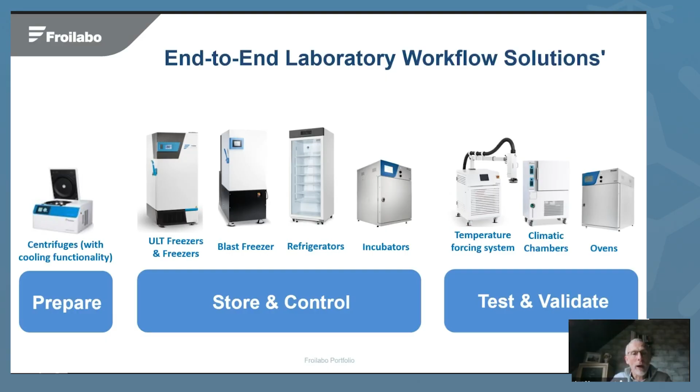requirements. Today, I will focus on sample storage at -80 degrees. We are completing our range of ULT freezers with several models based on dual cooling technology. Froilabo introduced its new BioMemory dual cooling range to offer premium performance with dual cooling technology at an affordable price. We consider that we can offer the best ratio of quality, performance, and price on the market for premium models.

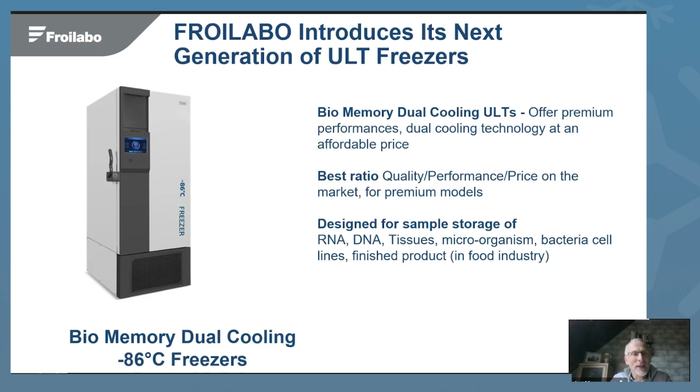As it is for our existing models, BioMemory dual cooling models are designed for sample storage of RNA, DNA, pieces of tissue, microorganisms, or finished products in the food industry. The key benefit of those models is the use of dual cooling technology. It guarantees the highest level of safety. If one compressor fails, the second one can keep the unit at -80 degrees.

But until now, the limit of dual cooling technology was cooling performance compared to the two cascade technology. With our system, we offer high temperature homogeneity and fast temperature recovery time. It is a significant difference compared to the existing models on the market. Thanks to the use of a variable speed compressor and VIP plus insulation, we have a low power consumption.

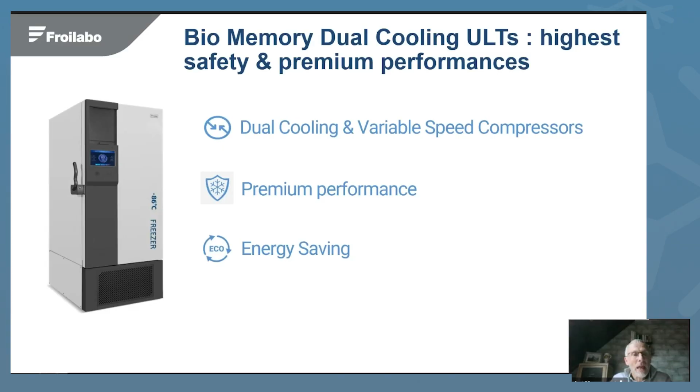We recommend using our BioMemory dual cooling if you are working in industry, a pharmaceutical company, or biotech, because you need the maximum safety level. If you want to be compliant with sample storage and ISO certification, good manufacturing process, dual cooling technology delivers the best features for you and guarantees to keep samples at -80 degrees, even if something happens in the cooling circuit.

The worst case could be a defective compressor in one ULT freezer during the weekend. With dual cooling, the second compressor will keep the temperature at -80 until the defective compressor is repaired. The low power consumption has a significant impact on the cost of operation. Today, for a 700 liter model, the power consumption is 8.5 kilowatts a day. And if we compare to the 500 liter model, we can guarantee less than 8 kilowatts a day as power consumption. It's very low.

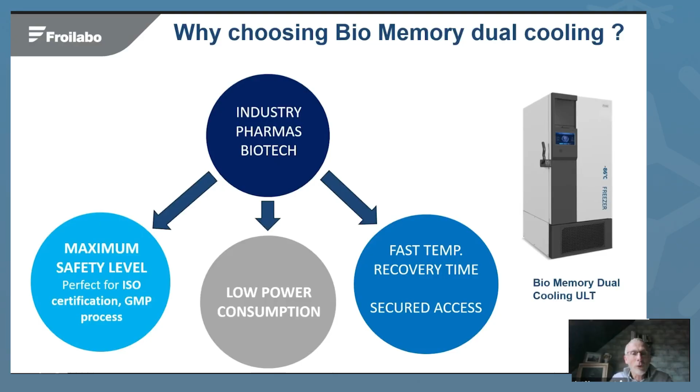And even if the end users are opening the door several times a day, we guarantee a fast temperature recovery time when you close the door. The software includes secure access with different user profiles. How does dual cooling technology work? It's very simple to understand.

As described in the drawing on the left side here, you have two independent cooling circuits, each with the ability to reach -86 degrees. We are using a mix of gases to deliver the expected cooling efficiency in each circuit. Also, now you can understand that if one cooling circuit has failed, the second one can work independently until the repair is done. We are also using the last generation of variable speed compressor to guarantee the lowest power consumption possible.

But the cabinet is also a very important part of the performance. The cabinet produced in our factory has efficient insulation, including the latest generation of VIP, and the double door design. The double door design means the main door has a gasket to close the system efficiently, and each internal door also has a gasket. Last but not least, our interface is easy to use and includes all features required by our users.

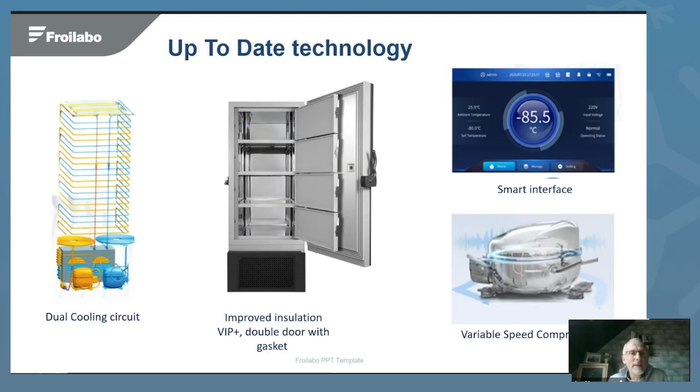We tested the performance of our equipment. Here you have the results for the BioMemory dual cooling 568 liter model. We chose this model because this is the model that the majority of customers are choosing on the market. The pull down time: we need 3 hours 30 minutes to reach -80 degrees from room temperature. It means that if you turn on the unit in the morning, before lunchtime you will reach -80 degrees. It means that your operation will be really facilitated.

I spoke before about the efficiency to recover the temperature when you open the door. If you open the main door and the top internal door for 15 seconds, only 6 minutes are needed to recover -80 degrees at the top shelves. And you can see that the center shelves and the bottom part of the cabinet are not affected by the door opening. And this is exactly the same for a 1 minute door opening.

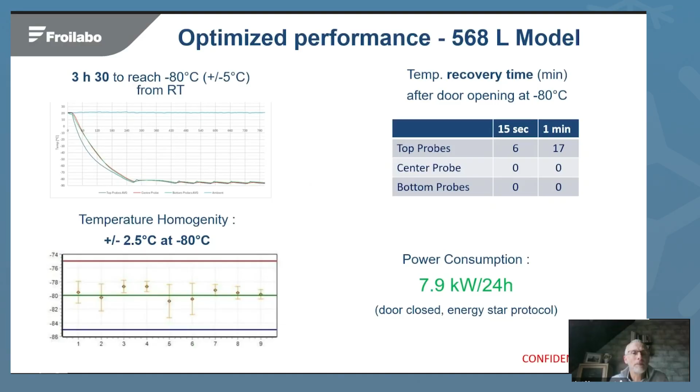Also, we guarantee the highest level of safety for your samples thanks to unique benefits. Fast recovery time, 13 minutes to recover -80 degrees, the mean value after door opening. High temperature uniformity, and the longest defrost time. The data are not shown here, but we guarantee 5 hours before reaching -50 degrees when the system is turned off. And all benefits listed here can be offered with a competitive price.

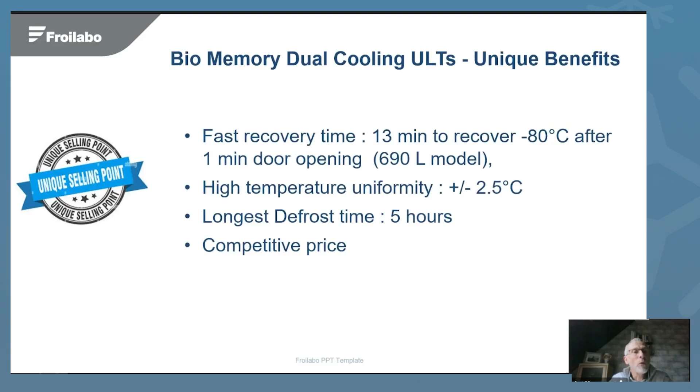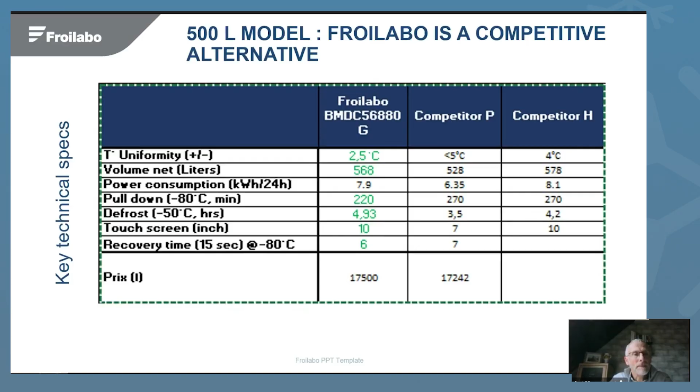How can you compare the new BioMemory dual cooling with the existing Froilabo model of ULT freezers? Our actual model, the Evolution model, is mainly recommended for hospitals, biobanks, and research centers. Why? Because we offer large volume with a small floor footprint. This is the main requirement for this type of customer. Hospitals, biobanks, and research centers also have multiple users that can open the door during the day. And we can also guarantee very fast temperature recovery time to guarantee the safety of the sample.

Even though we are working with the existing model with a 2-cascade system, we have a low power consumption, around 11 kilowatts a day. And we can guarantee for all models we now have in our range of products traceability and data management. You can record the history of what happens on the unit regarding alarms, door opening, different parameters, and you can export all records on a USB stick.

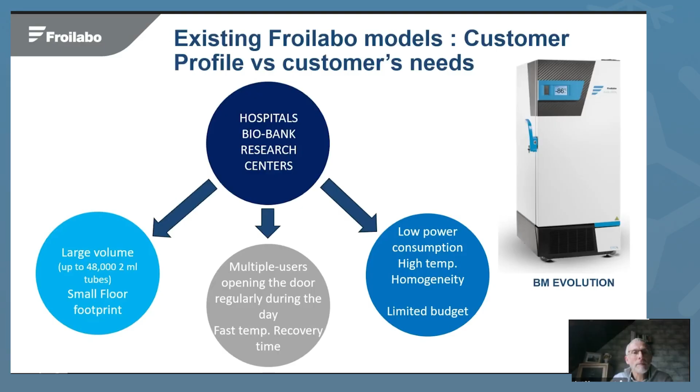All information I share with you is available on froilabo.com. I will now show you how to find this information on our website. To reach the ULT freezer section, you can select in products ultra low temperature freezer minus 86 degrees. You will get access to the complete range of products we can offer you. Here is the new BioMemory dual cooling freezer section. I will select this section and you will be able to see all information on the different models.

You have a product description focusing on the last generation of smart interface, giving you some information about the power consumption, the level of performance, some explanation on the dual cooling system, and you can also choose the model you need. Here you have the list of models with the 568-liter model. We also have a 708-liter model, and the largest one is an 818-liter model.

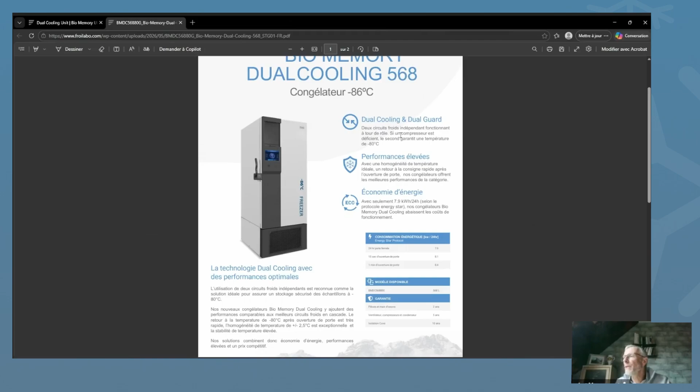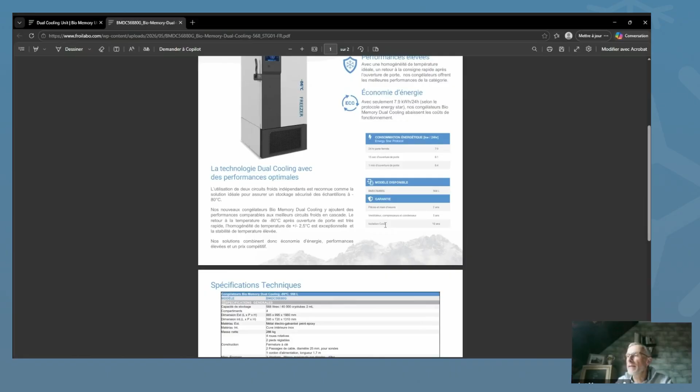For example, I will open the datasheet for the 568 model. You can get all the benefits I already mentioned. You can get data about the power consumption. We are able to share with you the level of guarantee we offer, 2 years on spare parts and labor, 5 years warranty on the compressors, and 10 years warranty on the insulation of the cabinet. And it's very important also to note that you can find all specifications about the model.

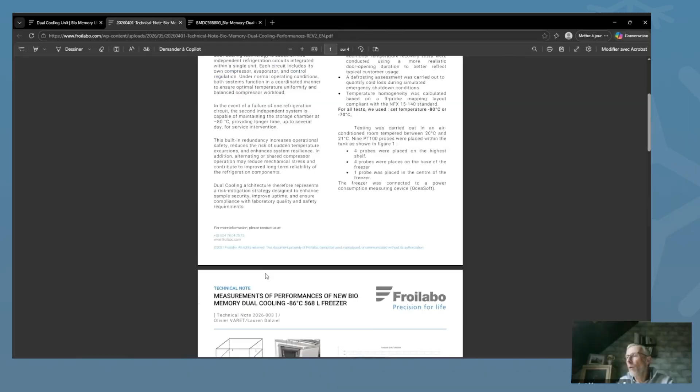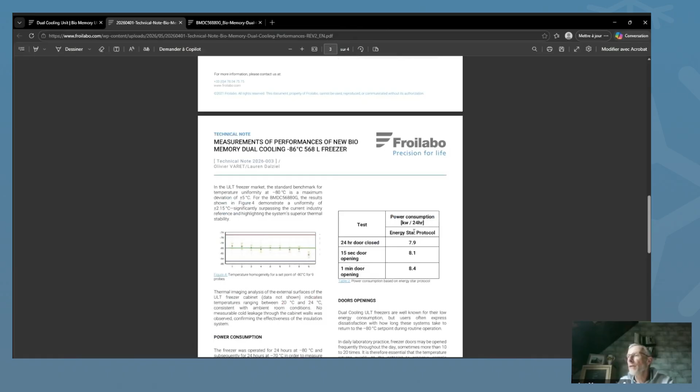If I come back to the website, I would like to finish my presentation by showing the technical notes available on the website. The technical notes include all results I shared with you during this presentation. You can find how we manage the recording of the temperature during the test, how we perform the test, and all results regarding the pull-down test, the temperature homogeneity analysis, the power consumption, and the way we recover the temperature after door opening.